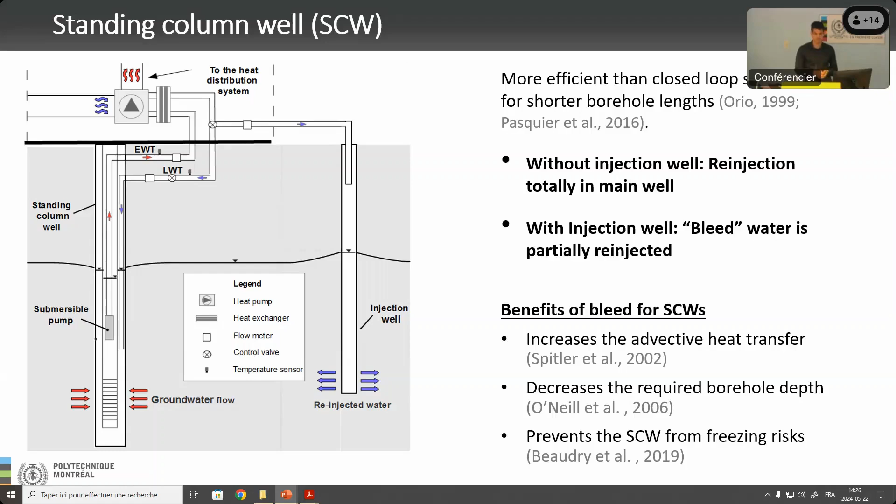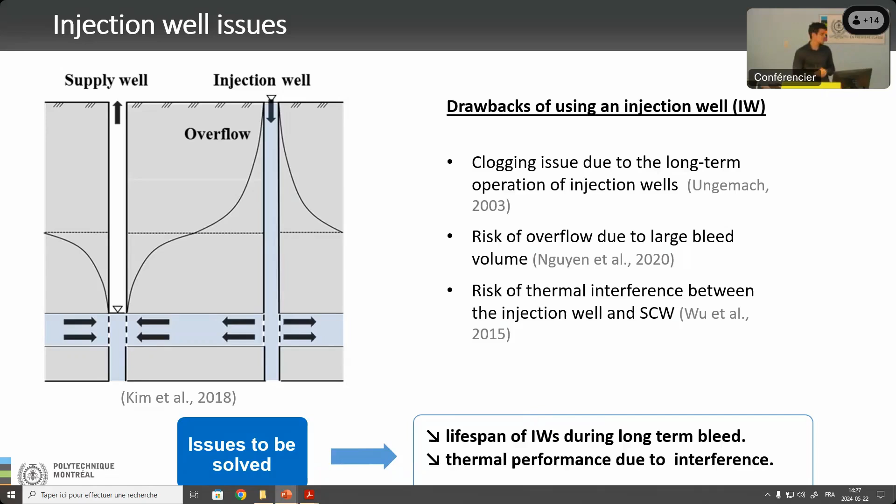So in this case, our study aims to solve these issues and tries to find a new alternative way for bleed water disposal. So our proposed solution includes having infiltration as an alternative to the injection well, and also using a storage tank for the storage of large bleed volume. This solution is illustrated in an underground perforated storage tank, meaning that rather than directing the bleed water into an injection well, it will be directed into a storage tank, and then it will be infiltrated to the unsaturated zone through its bottom perforation.

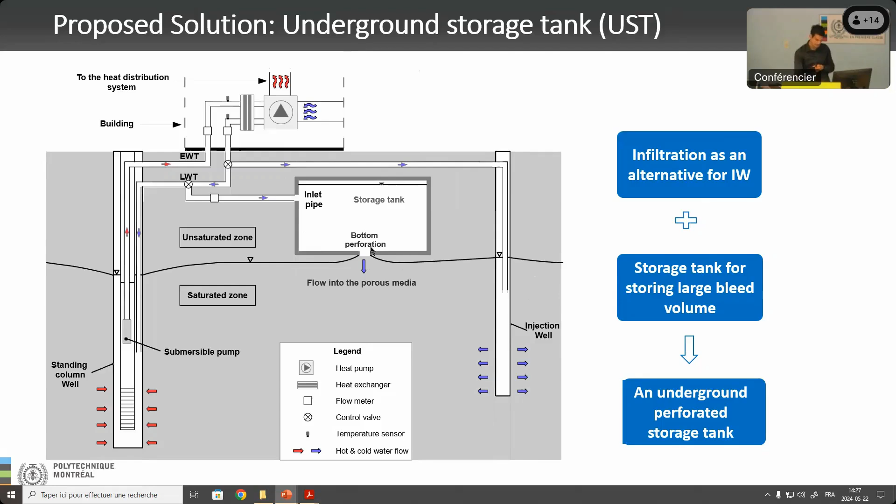And the site which is proposed to integrate this new bleed method is our experimental site located in Varennes, which is about 30 kilometers from Montreal. In that site, we have an operating standing column well and an injection well connected to our mobile geothermal laboratory. The hydrogeological and geothermal properties of this site are used for our methodology, and also the bleed parameters of the operating standing column well in this experimental site.

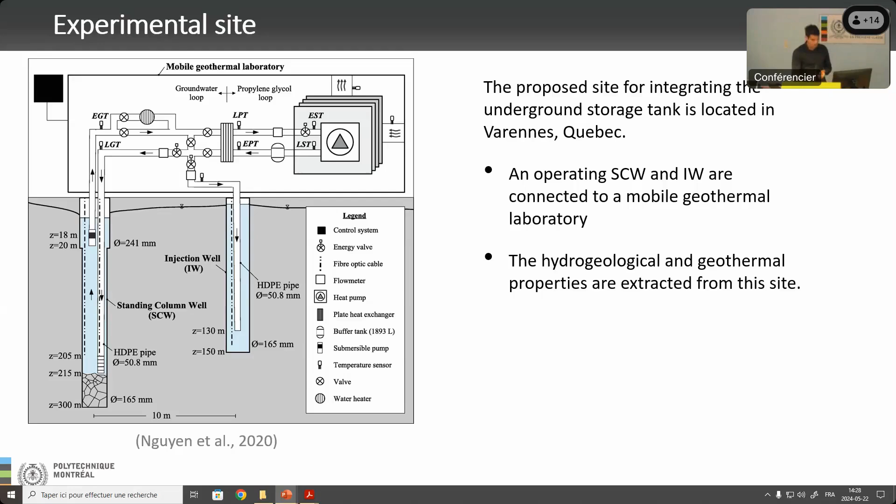To prove this new bleed method, a finite element numerical model has been constructed for this purpose using COMSOL Multiphysics. The purpose of this 3D numerical model is to predict the thermal and hydraulic behavior of bleed water inside the storage tank, and also when it is infiltrated towards the saturated zone.

This numerical model will solve these kinds of differential equations. For example, in the storage tank, the fluid flow is governed by the Navier-Stokes equation. In the unsaturated zone, it is governed by Richards' equation. And in the saturated zone, the fluid flow is governed by Darcy's law.

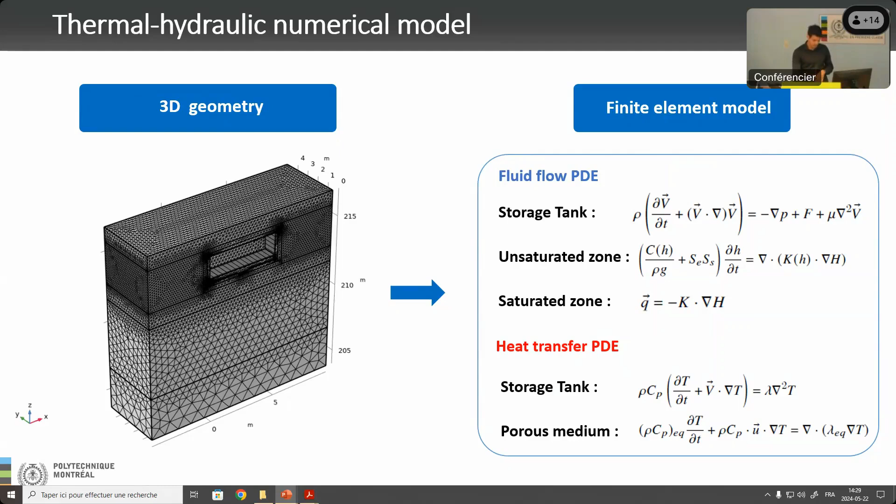And to represent the operational conditions of this storage tank in the experimental site of Varennes, these boundary conditions were implemented. For example, at the top of the model, we have included the effect of climate conditions. In the sides of the model, we have included the effect of the regional hydraulic gradient. And in the bottom of the model, we have included the geothermal flux considering the specific experimental site. And here the bleed water parameters, when the bleed water is entering the inlet pipe of the storage tank, were also included, and the parameters are shown in more detail in the next slide.

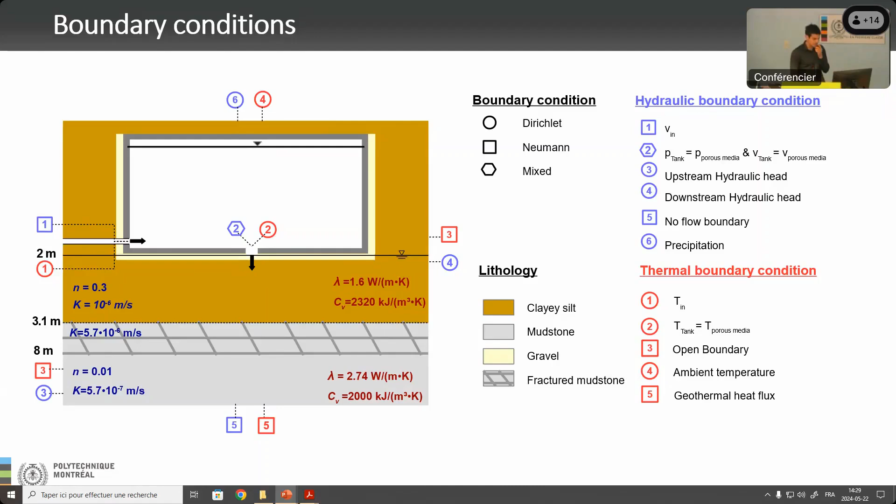So here, the bleed parameters for the operating standing column well are the bleed flow rate and the bleed temperature. These parameters are from the operating standing column well. It operates in a 30-day period during heating mode. So what happens in this simulation period? This standing column well has generated about 120 cubic meters of bleed water to fulfill the heating demand of 6,400 kilowatt hours.

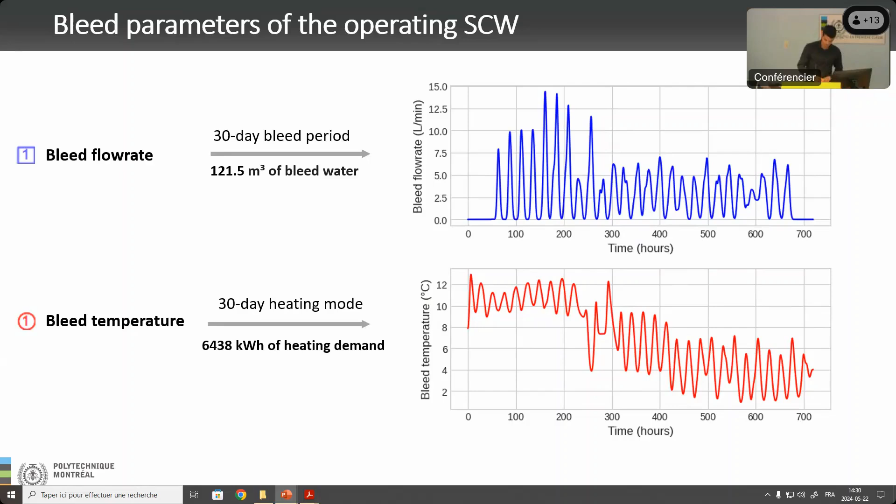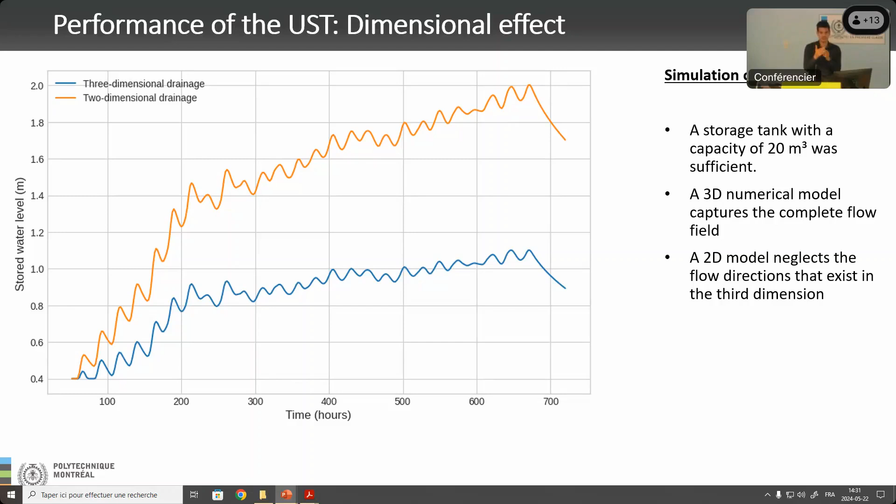It was also interesting to compare this three-dimensional case with a similar two-dimensional case, and it is evident that the two-dimensional case somehow underestimates the drainage performance of the storage tank, which is logical, since the 3D numerical model captures the complete fluid flow compared to the two-dimensional case, where the drainage and the fluid flow is not complete.

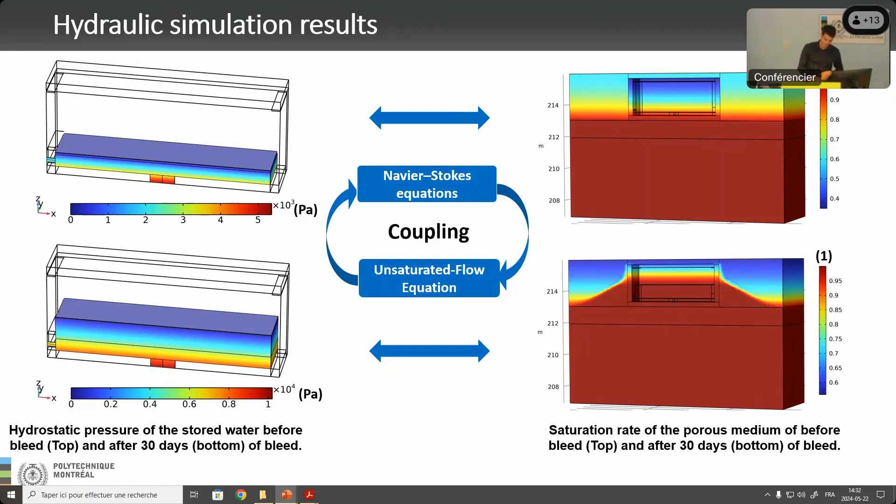And also, it's important to mention that the key element of this work is to couple the Navier-Stokes equation with the unsaturated flow equation, or Richards equation, to mimic the drainage condition for this simulation. And it's also interesting to evaluate the drainage flow path, like we can see here, the streamlines of the infiltrated bleed water reached the depth of fractured rock, and it has rejoined here, in the blue streamlines, the water which is due to the regional hydraulic gradient. And here I suppose that these results answer all the questions related to the groundwater sustainability issues for this new bleed method.

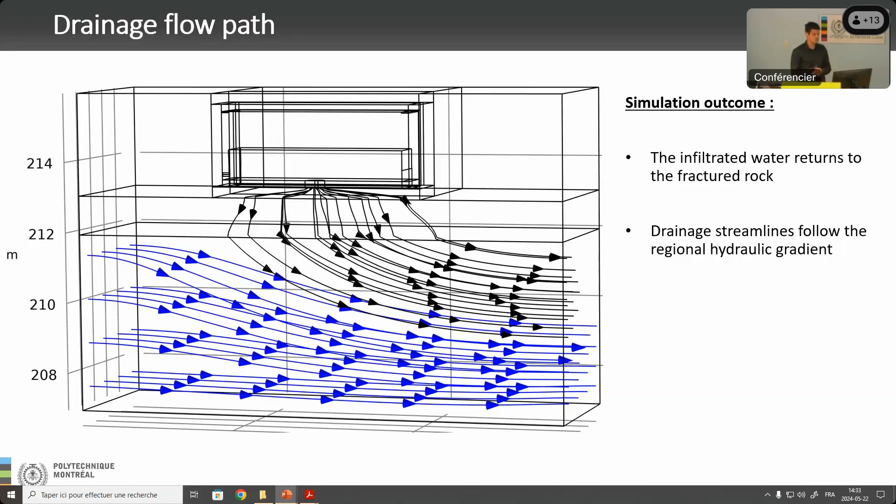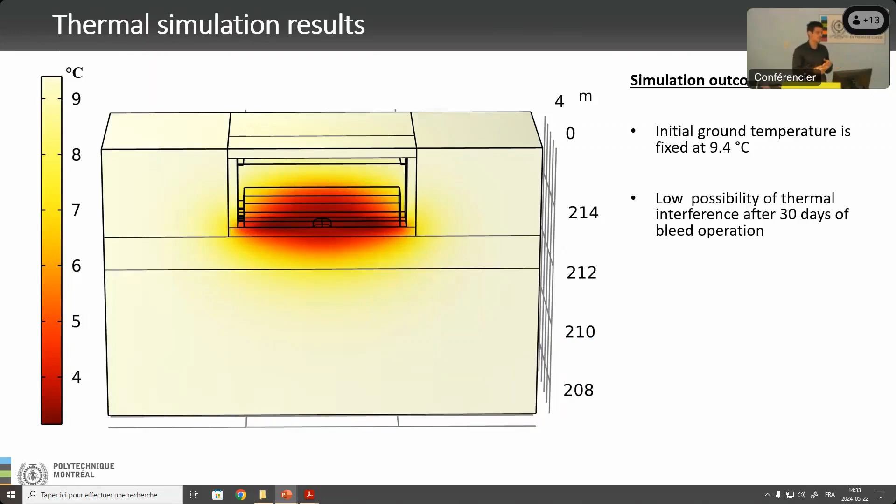And lastly, for the thermal simulation results, we have fixed the initial temperature at 9.4 degrees Celsius. And the thermal plume, we can see here, has reached a limited extent, meaning that there is a low possibility of thermal interference compared to injection wells, since the thermal interference of injection wells is much deeper than in the case of infiltration.

So the contribution of this study is that we have proven that specifically the underground storage tank is an alternative for the injection well, but more generally that infiltration can be an effective method for replacing the injection well during a monthly period of bleed. Also, this storage tank, even though it has a 20 cubic meter capacity, has successfully drained and stored about 120 cubic meters of bleed water. And also, it's evident that using infiltration to the surface could lower the risk of thermal interference compared to injection wells.

But what could we suggest concerning this work? That we can develop an experimental site to validate these numerical results, and also additional improvement can be implemented to model the fracture flow in the specific experimental site, since we have used the equivalent porous medium method to simulate the fracture flow.